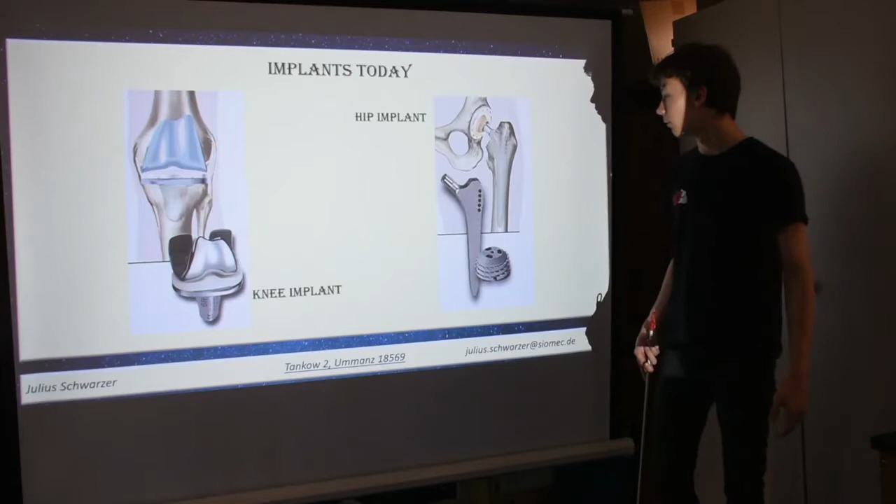Okay, let's get started. At first we have two implants I wanted to show you. First, here we have the knee implant. It goes right inside here. And here we have the hip implant. That's how it looks. This thing here goes right inside the hip, and this one in the upper bone. And you can do things like with your normal leg. However, this is not that important.

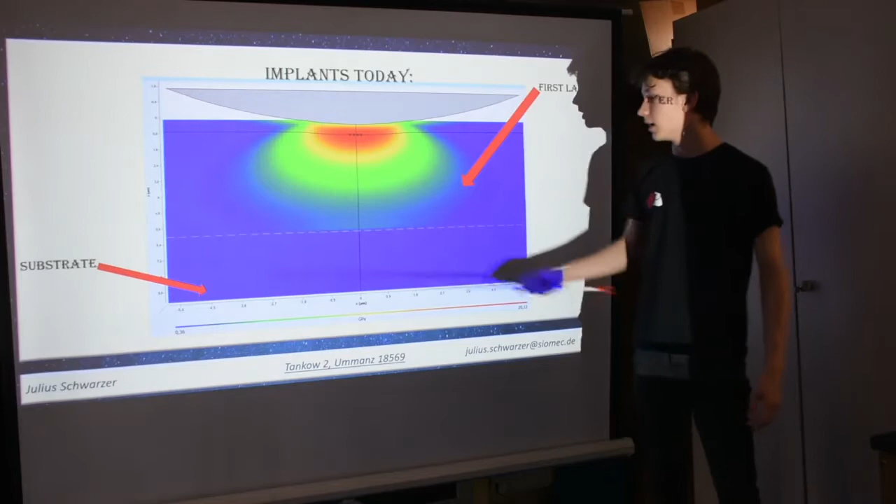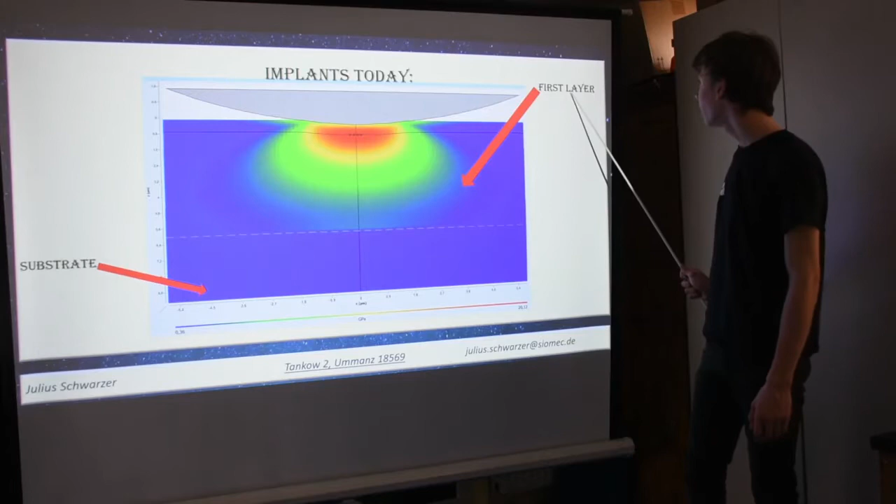But this is more important. This shows us how an implant is built. Here we have the substrate, which is supposed to be blue. If everything over here is blue, then the substrate is alright. Here we have the first layer. That is what is protecting the substrate from a counterpart, which is this thing.

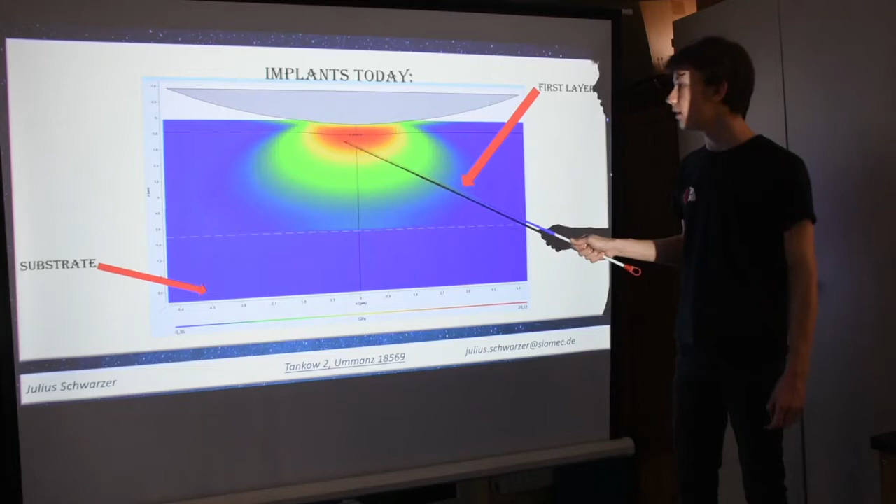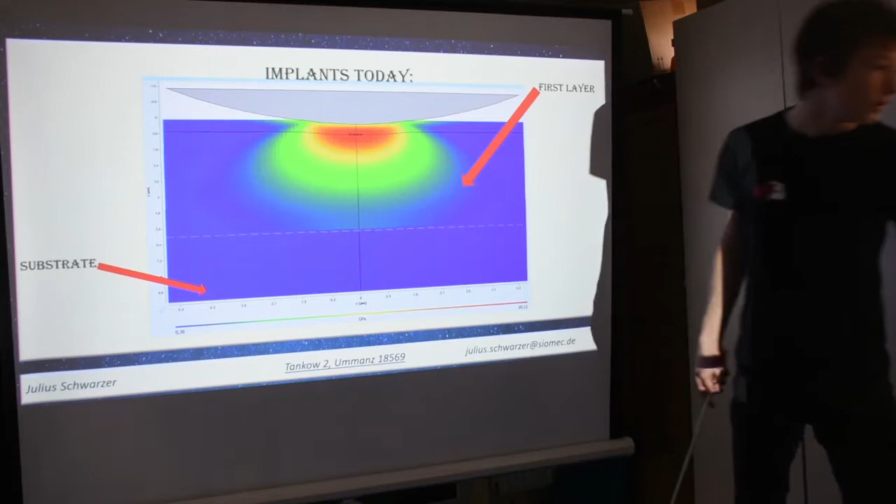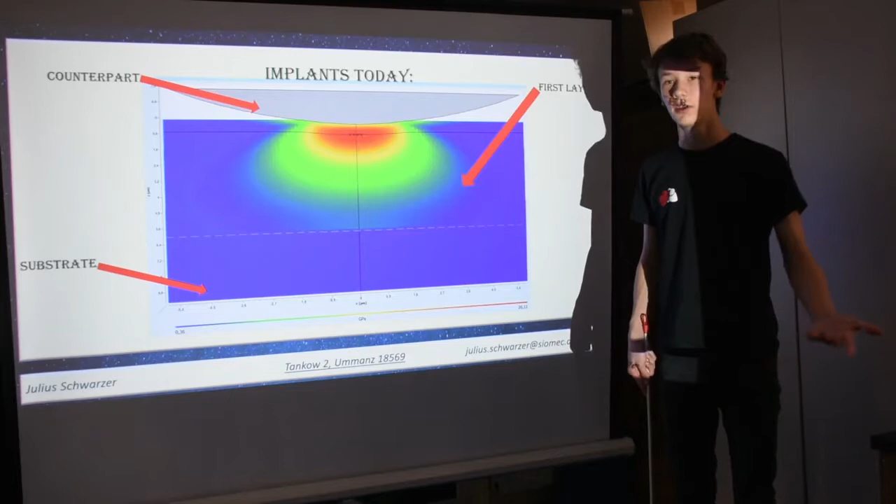Now here we can see some other colors. These show us the stresses. The more red, the more dangerous it is. So this is the counterpart. As you can see here, the counterpart survives pretty well. The counterpart can be the other part of the implant, but it could be anything else.

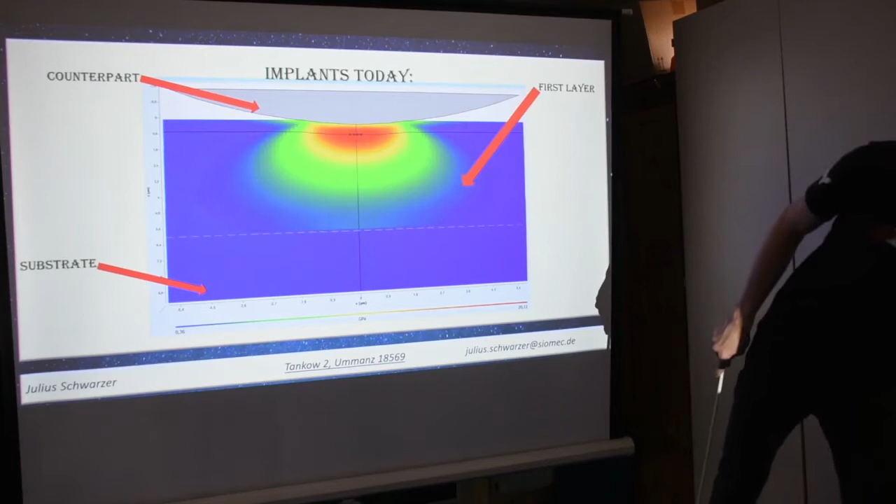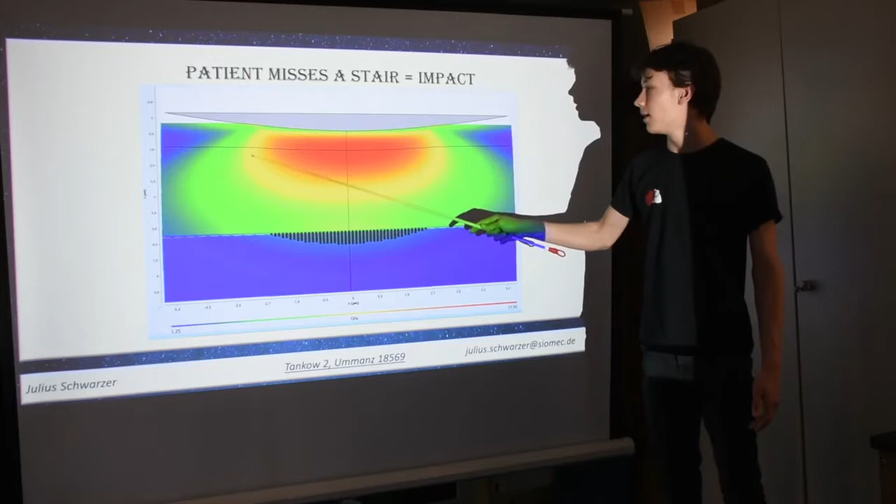Now in the second picture, it's like when a patient misses a stair or hops. This could happen. Again, here we have our counterpart, and here we can now see something black. This means that the substrate is getting damaged here. I marked it for you with black dots. So here we can see plastic flow in the substrate. The first layer is alright because it can survive even higher pressure, but the substrate can't, so it starts to break earlier than the first layer.

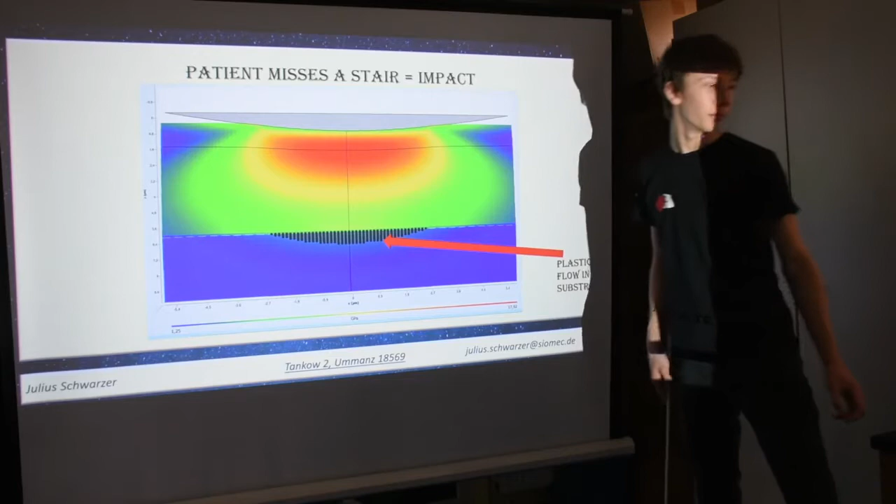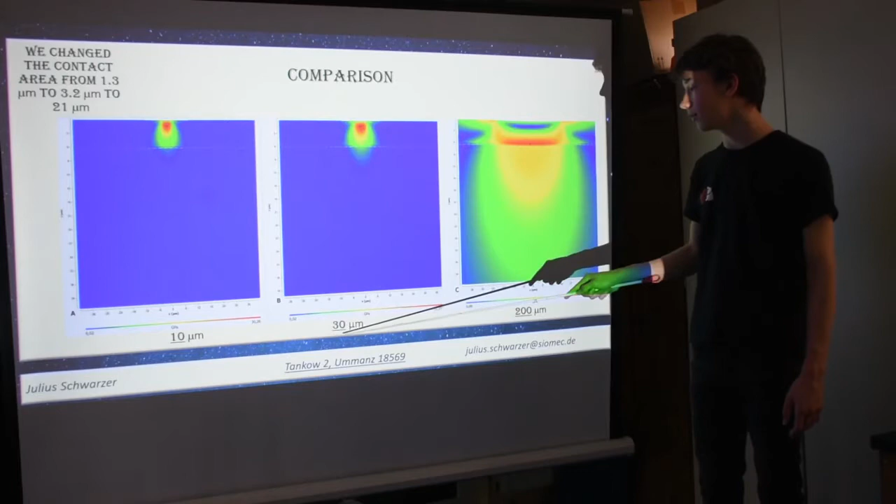So what actually happened in these two pictures? They were the same models, but in the first picture the implant survived, and in the second picture it didn't. Why? So I'm going to solve this problem for you. Here we have the first picture again. It was a 10 micrometer indenter pressed on the surface of the implant. And here, in the second picture, it was a 30 micrometer indenter. But this doesn't solve our problem of what actually happened.

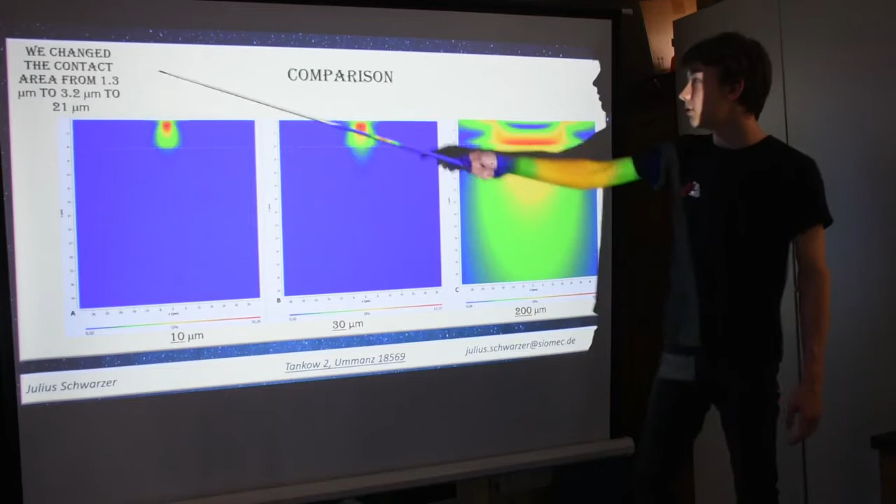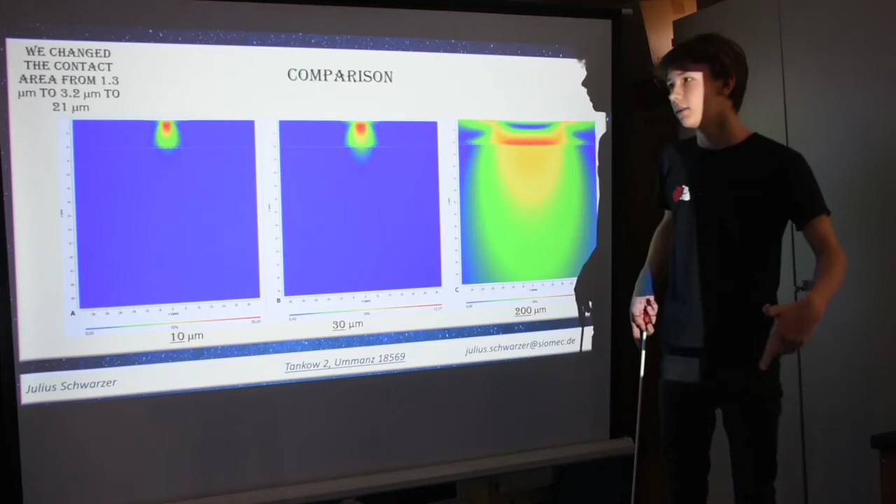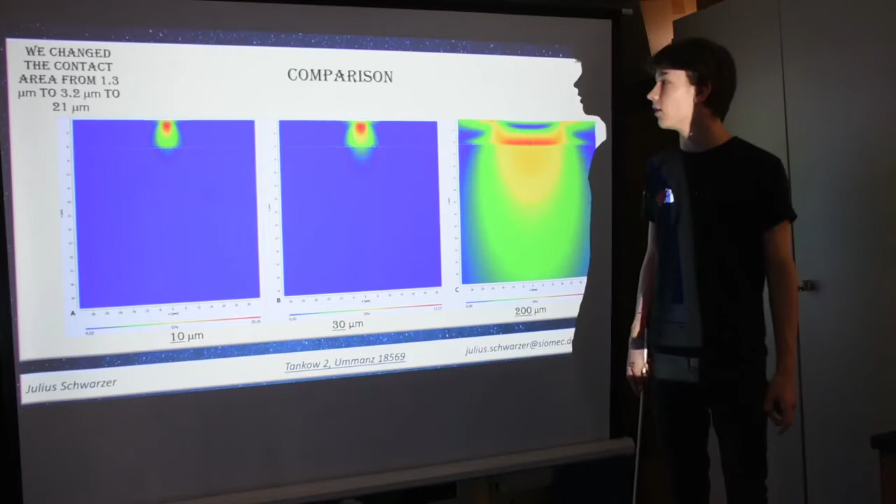Maybe you've already read this. It tells us that not the force matters most. It matters too, but more important is the contact area radius of the indenter pressing on the surface of the implant. So the bigger it is, the more damage it will make.

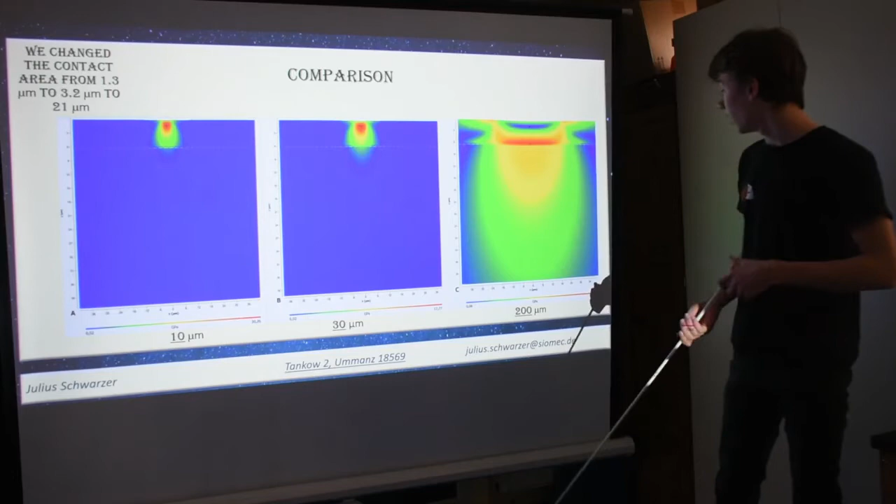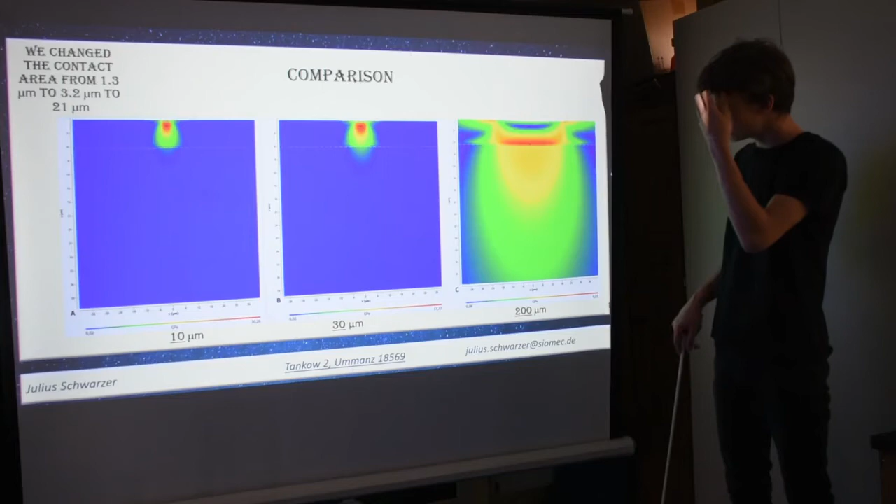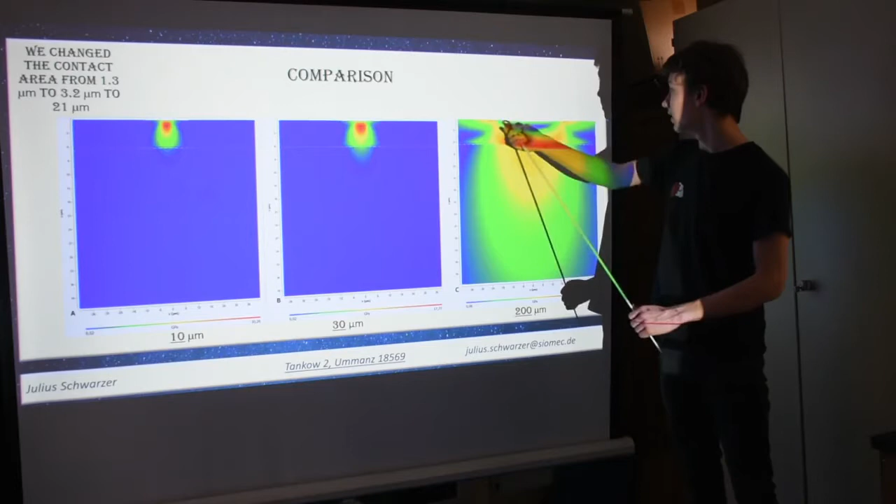Here we can see the worst case scenario which has been tested. The 200 micrometer indenter pressed on it, so that a 21 micrometer contact area size appeared right here, and it is a whole mess. The whole substrate is getting destroyed, even very deep.

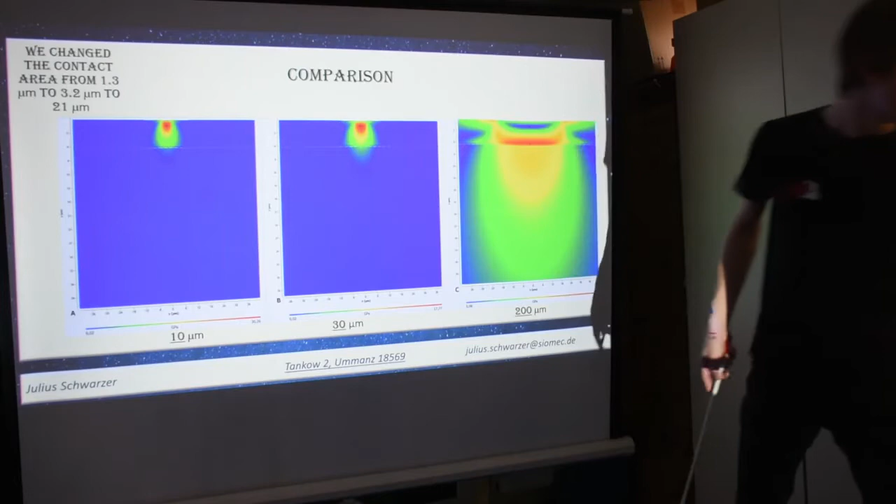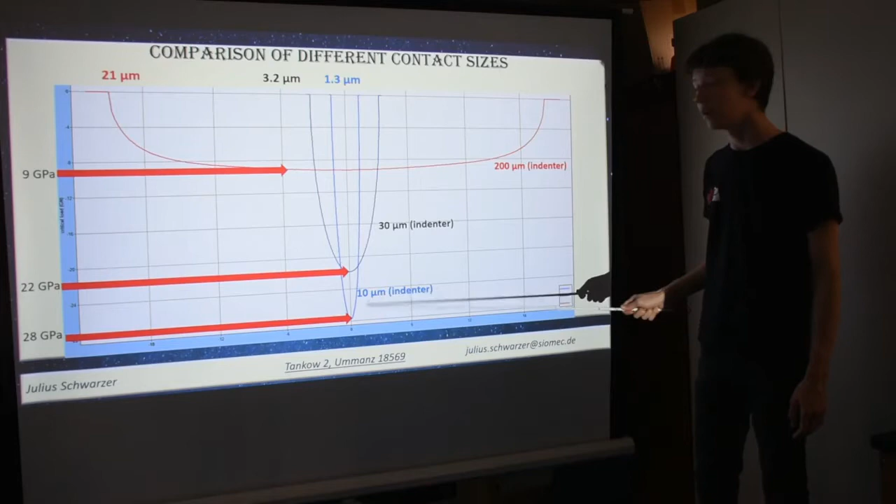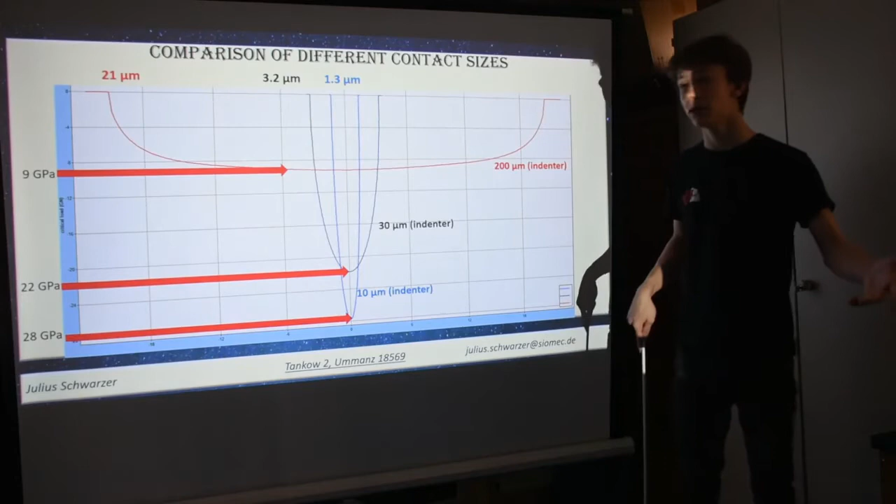So here we have a little graph. I wanted to prove to you that not the stress matters, but the contact area size. Here is our 10 micrometer indenter. It had a stress of 28 gigapascals and it survived. With our 30 micrometer indenter, we had 22 GPa, and as you remember, the substrate was damaged. So not good at all. And this is the worst case scenario with only 9 GPa, and it was a whole mess. So here we can see the contact area sizes, and we see that they matter.

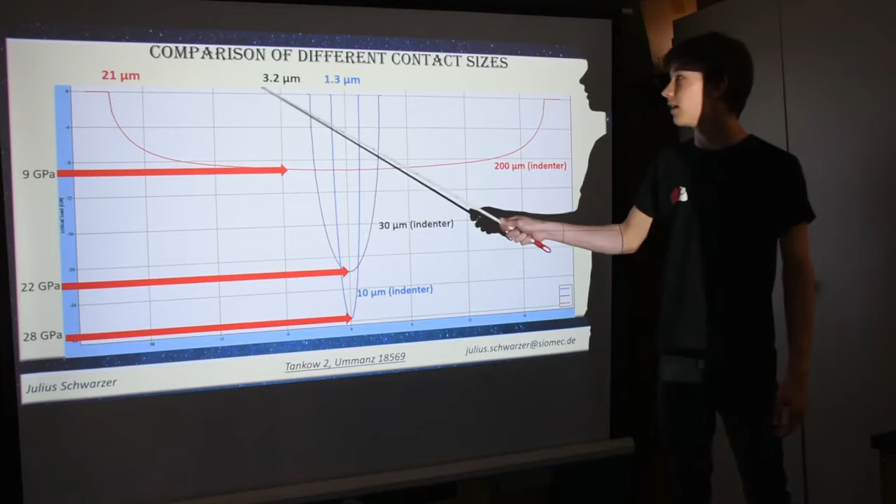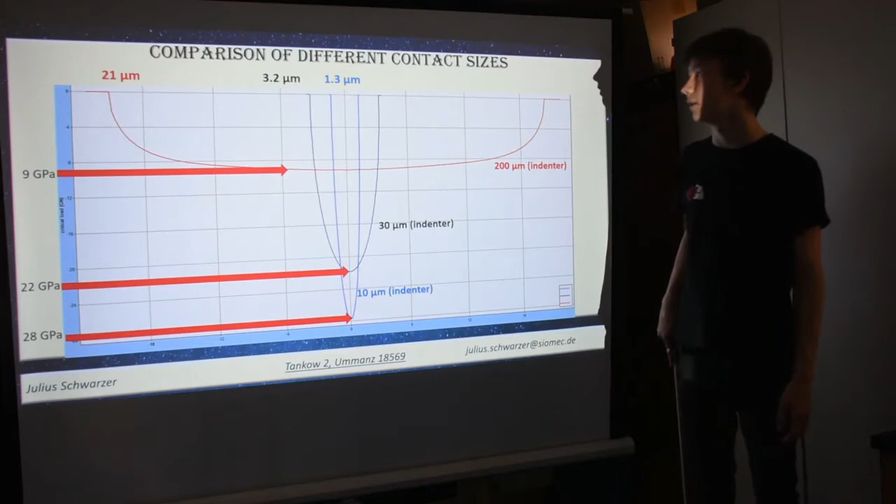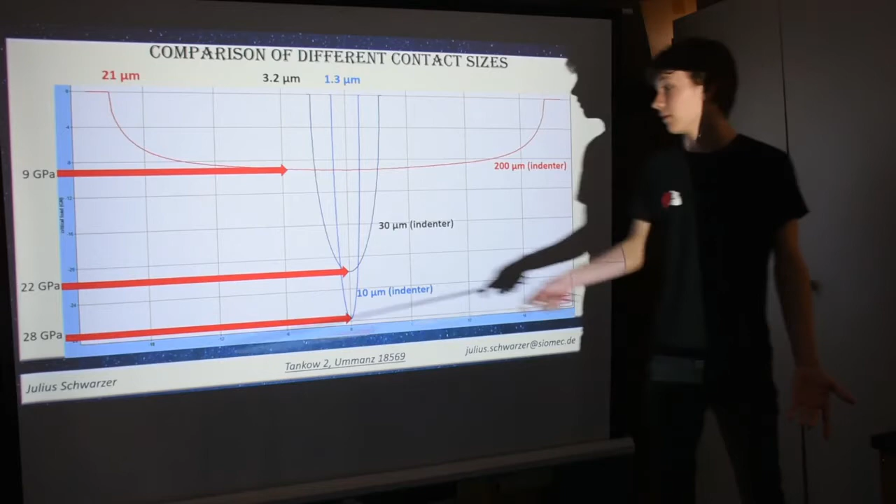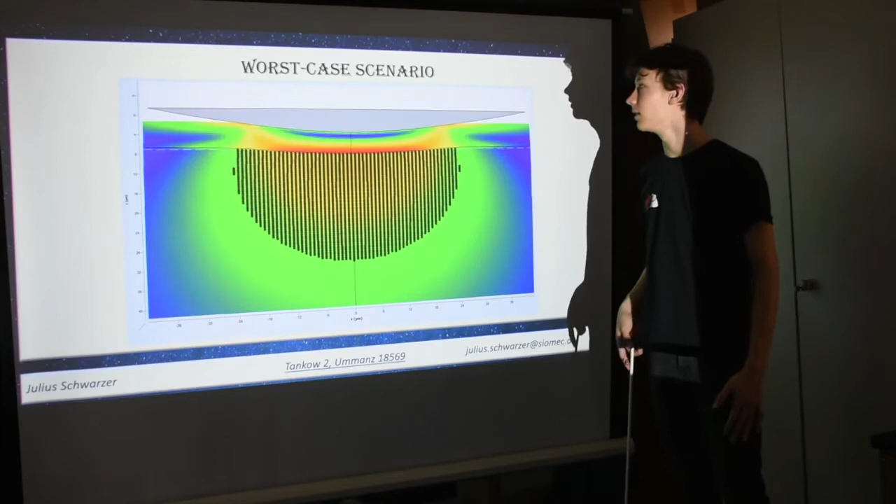Here we have a 3.2 micrometer contact area size, and in the worst case scenario it was a 21 micrometer contact area size. And all of them were completely damaged, while this one was completely okay, even though it was 28 gigapascals. So yeah, I wanted to show you the worst case scenario. Here we can see the black dots. It is massive, it is a whole mess, and this is like the worst case scenario.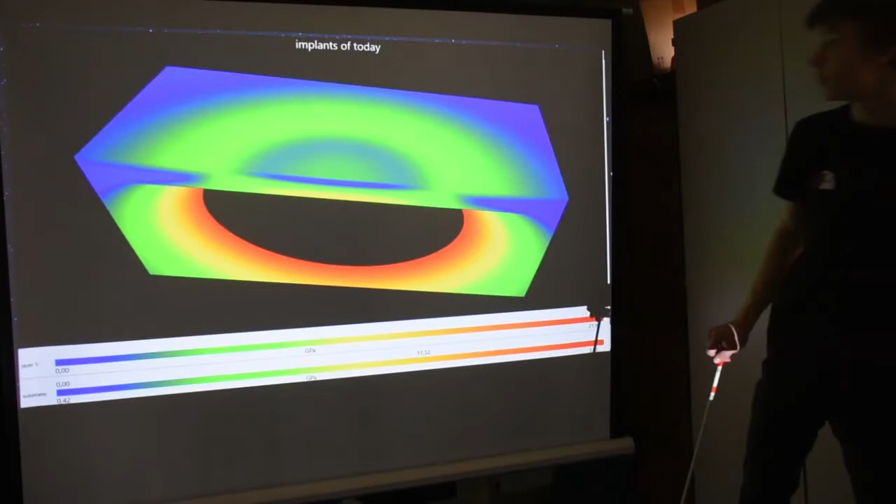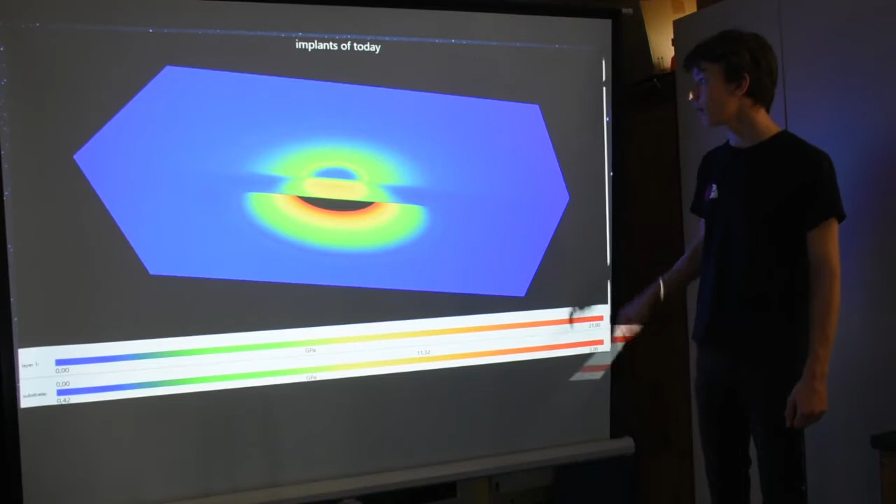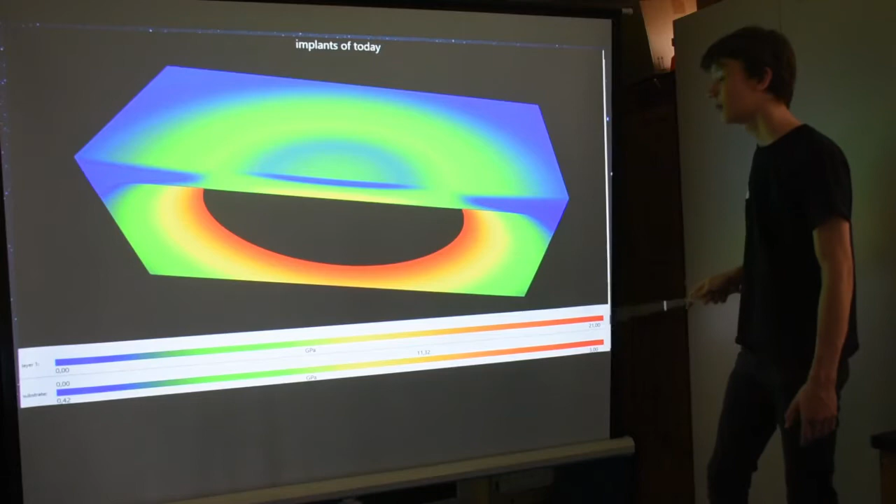Here I wanted to show you the worst case scenario in a little video. So the counterpart, which is maybe the other part of the implant, is pressing here on the surface of the second part of the implant. And here we have our first layer, which is completely fine. And everything which is black, right here, is broken or starts a plastic flow, which then will start cracking and so on.

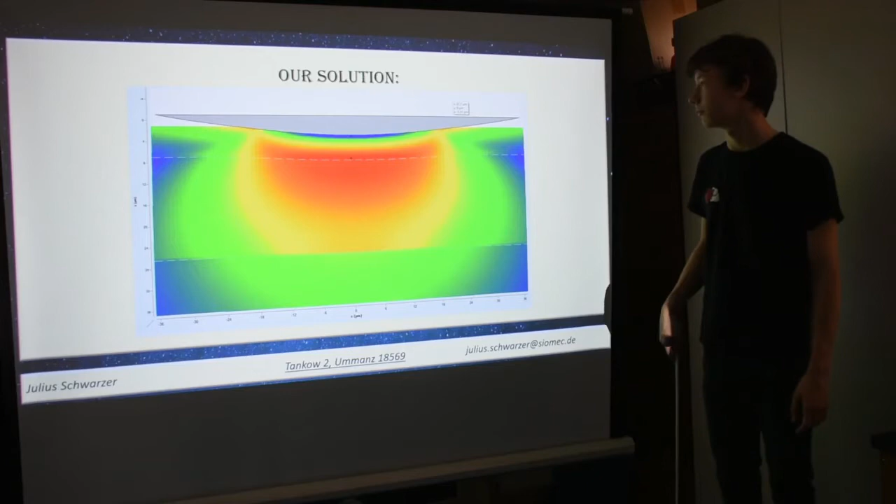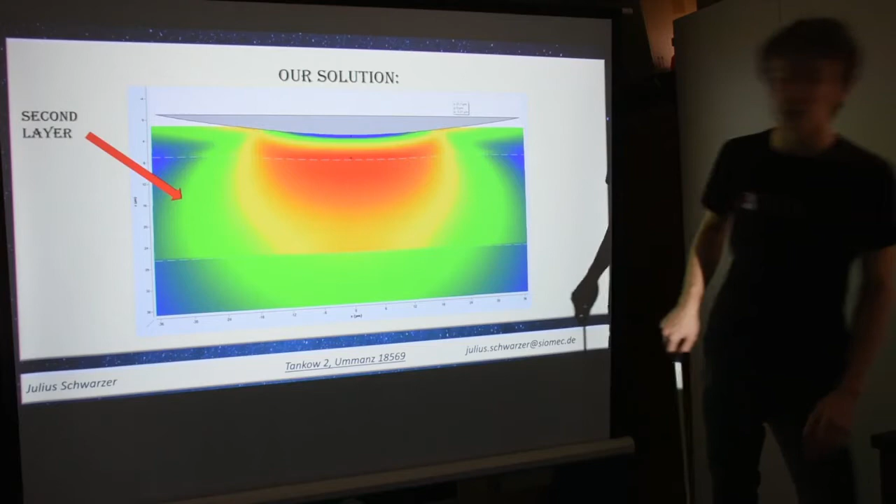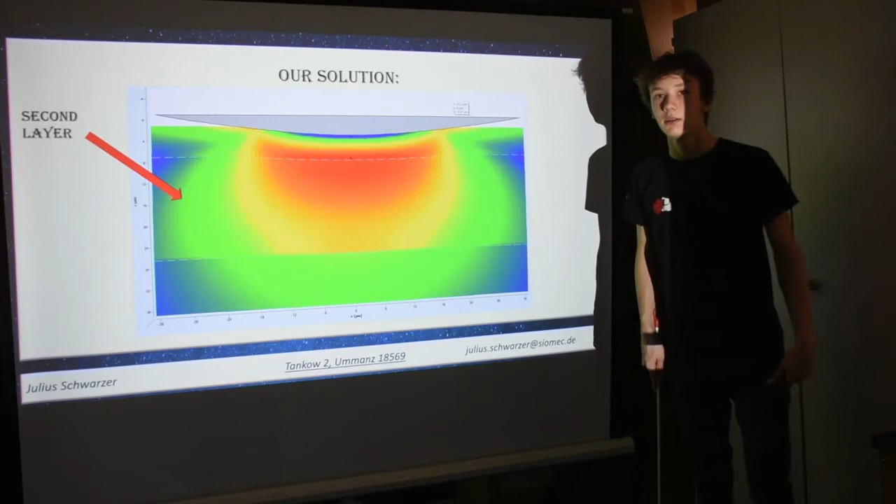Here we can see the only thing we did was adding a second layer. This was everything. And as you can see here, the substrate is completely fine. It is all green, all okay. The second layer makes a difference.

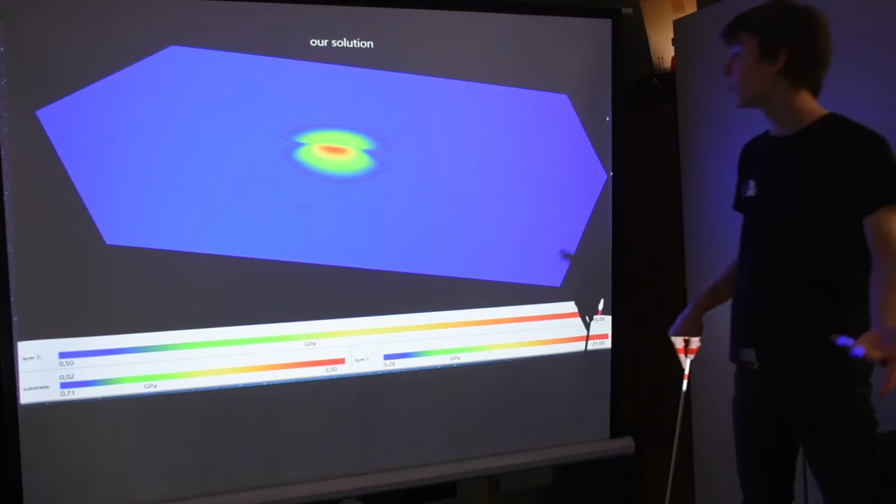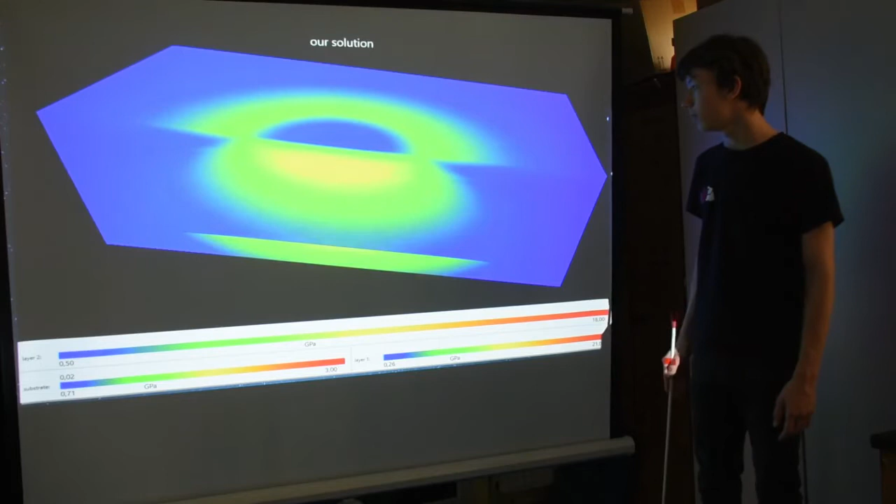I also have a video for this one. Here it is. Again, the counterpart is pressing on the surface of the implant, and we can see it is getting a little bit yellow here, but it is still all okay, and it is not breaking. It's all because of the second layer, because it's holding off the whole stress. So this is the solution.

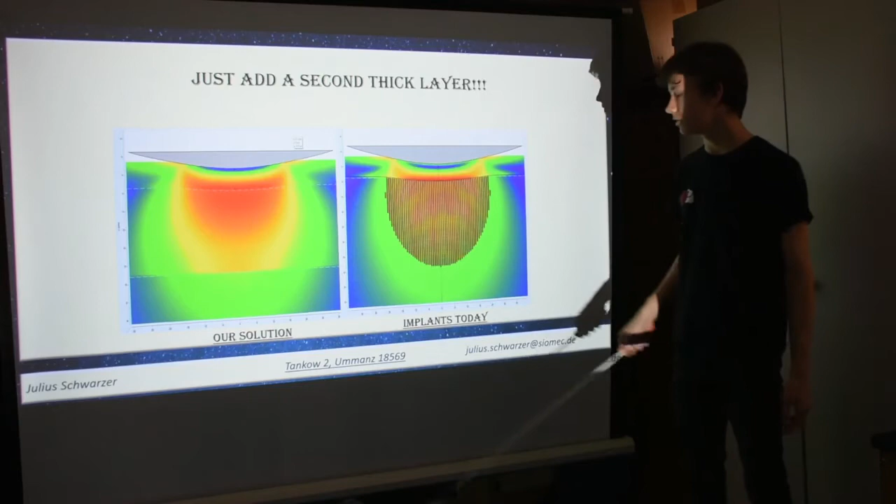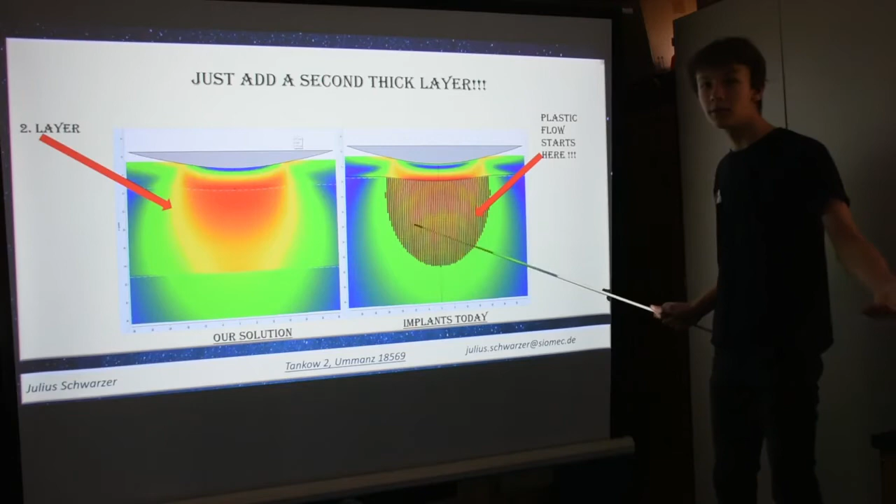We also have a comparison here to show you how good our solution already is. The only thing we did here was the second layer, and our solution is surviving the worst case scenario. And here, these are the implants of today, and we already saw this picture. It is a whole mess.

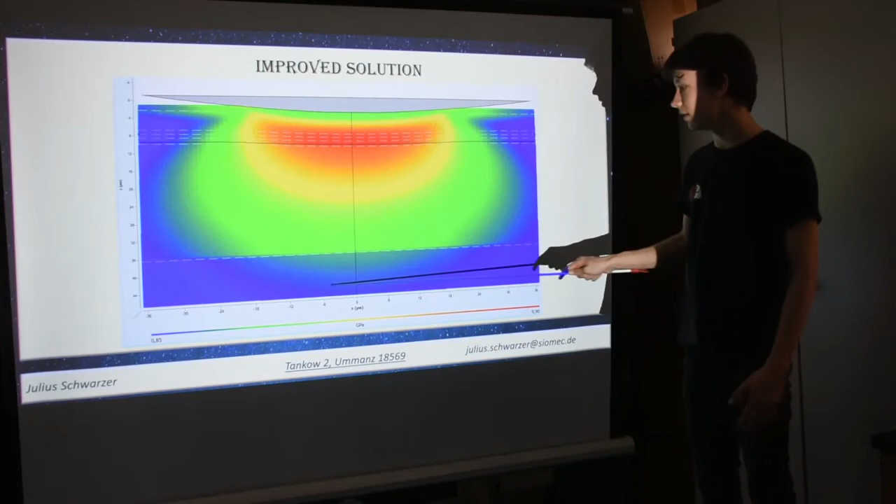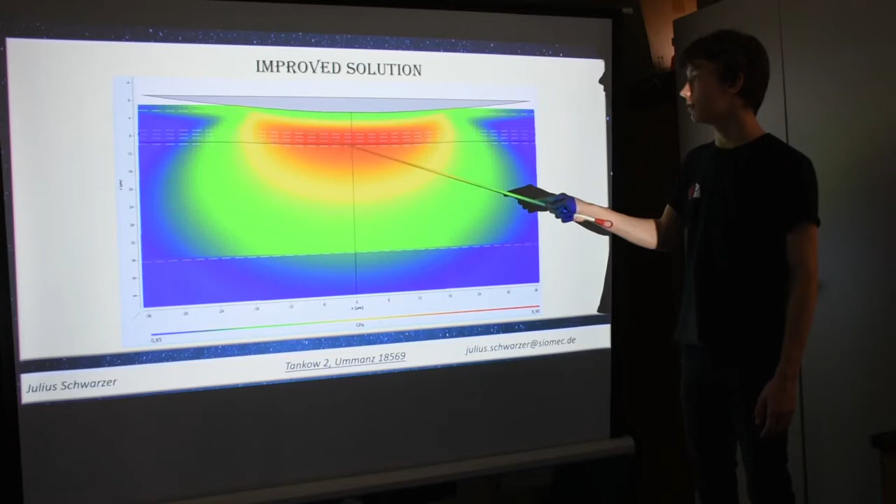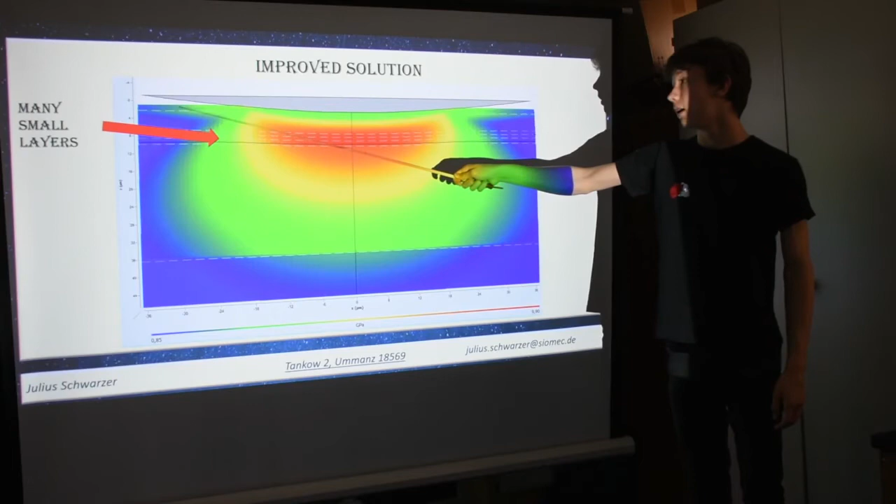However, if you want even more protection, like here, you can see there is no green, it is all okay, it is all very good. It's all because of these few little layers between the first and the second layer. This is the first layer, this is the second, and we just added some small layers right here. Also, we added a top layer right here, but this is unimportant. We are more concentrating on these ones because they make even more difference.

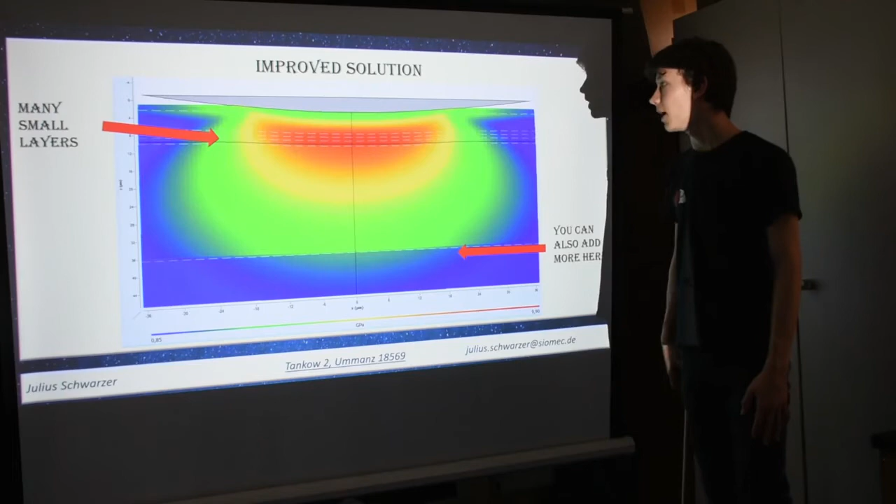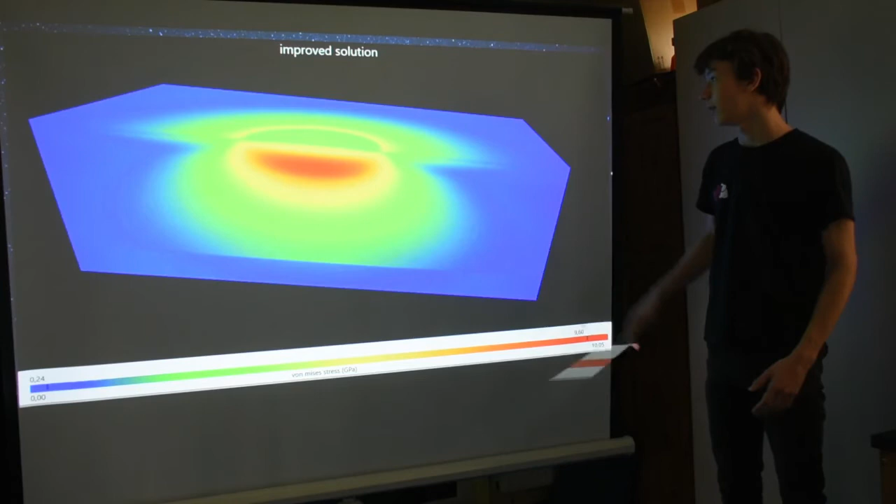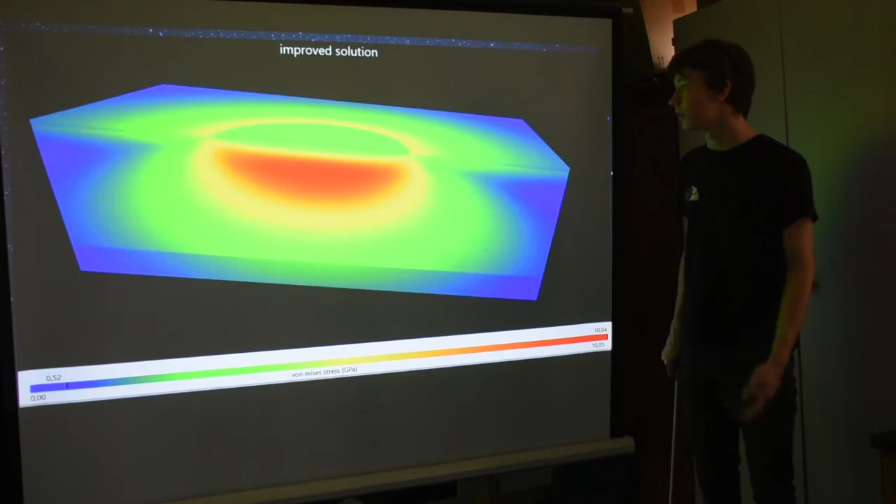If you want even more protection, you could also add some right here in between the second layer and the substrate, but you don't have to. We also have an animation for this one, and here's our improved solution. And you will see that the substrate is almost not being touched. Here it's looking kind of bad, but this is unimportant because the layers can survive this.

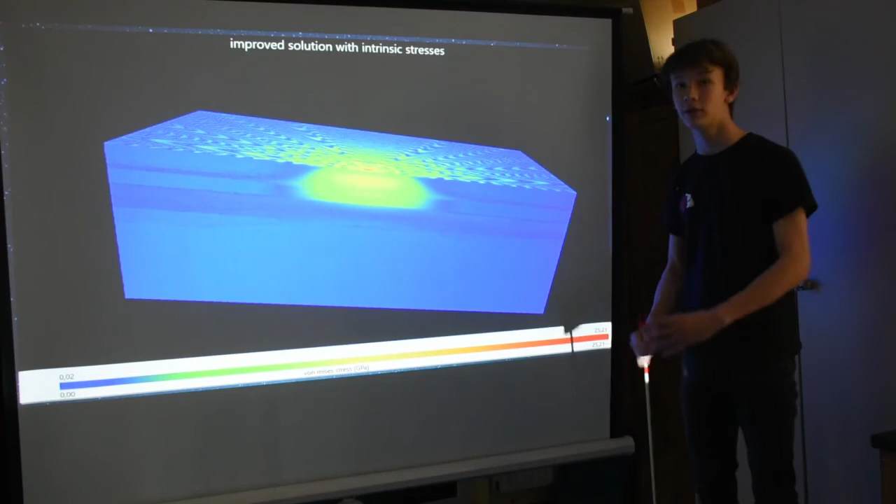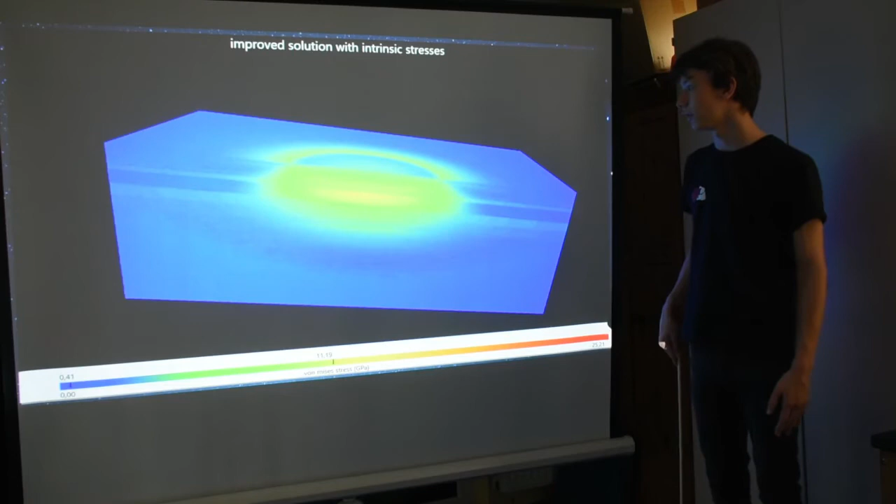Even better would be our improved solution, but built with intrinsic stresses, so that while you're building them, or before you're building them, you put them under stress. Then you will see this, and it is even better. We can see a little bit of shaking on the top, but this is unimportant. But it is even better.

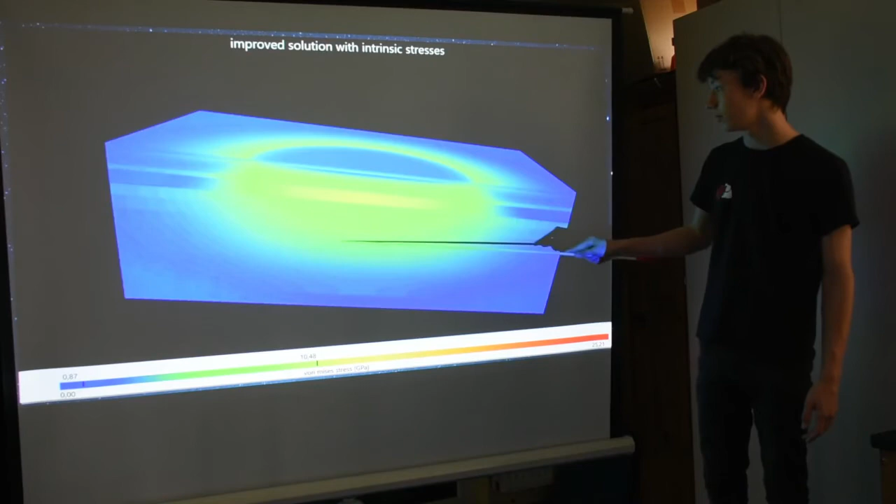You can see here, this one was the big layer, and it is all okay. It is not even really being touched, only a little bit green over here, but the substrate is completely okay. So yeah, this was basically my talk.